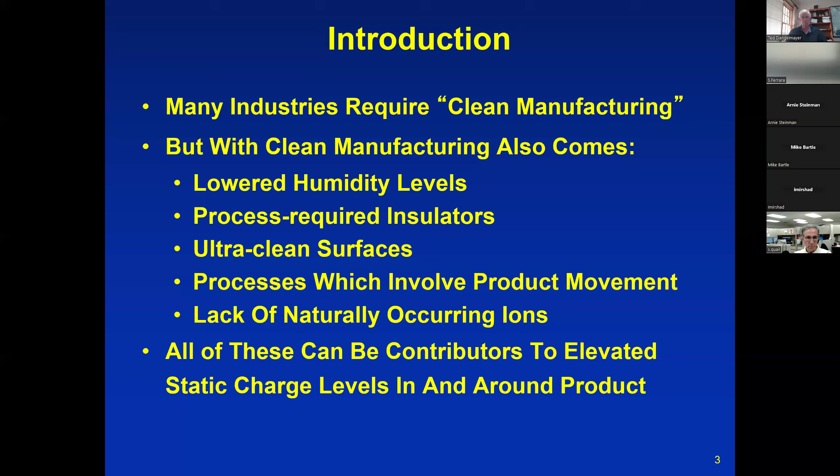So what we're going to talk about today is attraction, adhesion, and distance. These are the particle attraction mechanisms. We'll talk about some of the items of particle physics in air, deposition velocity - that's how fast particles are being deposited on a surface. They're due to gravity, to diffusion, and electrostatics. We'll see how these three methods of particles being deposited on surfaces interact.

We'll talk about electrostatic attraction, obviously, and we'll show you how we can calculate what are the acceptable electrostatic fields. We'll talk about electrostatic charge generation, electrostatic deposition rates, and finally methods of reducing contamination deposition in the clean room.

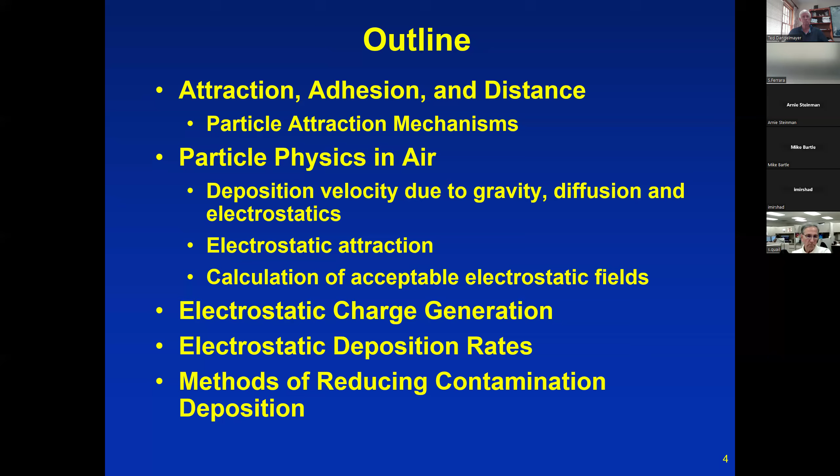Clean room. What is a clean room? A clean room is a room in which the concentration of airborne particles is controlled, and which is constructed and used in a manner to minimize the introduction, generation, and retention of particles inside the room.

Other relevant parameters like temperature, humidity, and pressure are controlled as necessary. This is the definition of a clean room that's in ISO standard 14644-1, which is called Clean Rooms and Associated Controlled Environments.

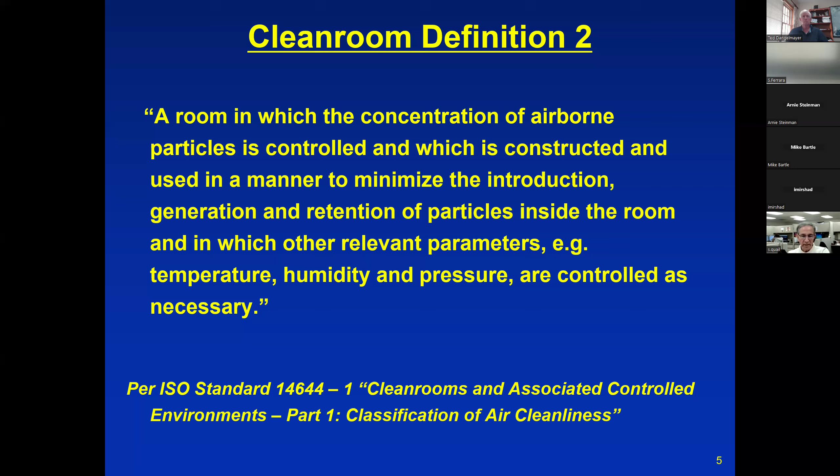Part one, the -1, is the classification of air cleanliness. And we'll see what this standard recommends in that respect.

A clean room is a space that's isolated by a wall or a similar partition where the degree of cleanliness is achieved by air pressurization and filtration.

So we have an incoming air supply. We filter it very highly with special filters, generally called either HEPA filters or ULPA filters. These are very high quality filters that take out most of the particles that will be coming in the air.

We have a wall, we have balanced pressure, and we maintain an overpressure near the floor where the air exits the clean room. So this is basically a clean room: a box, filtered air coming in, overpressure in the room to keep particles from coming in from the outside.

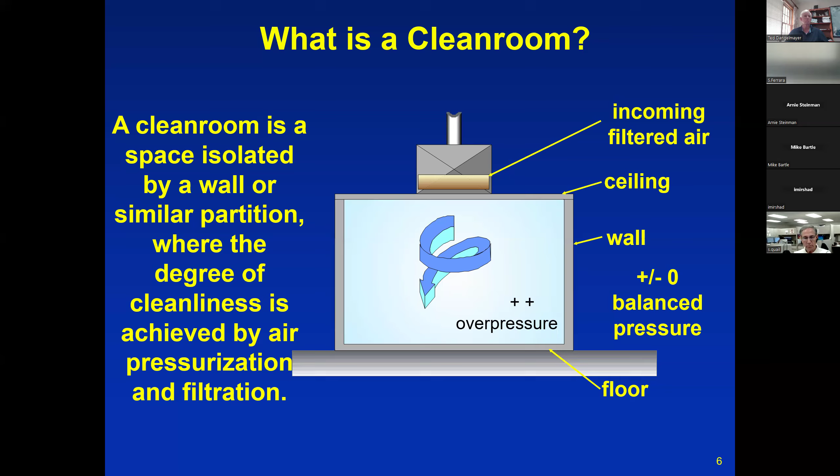Now, for many years, the industry in the US at least used what was called Federal Standard 209E.

Federal Standard 209E was an American standard, so it specified the number of particles per cubic foot that you could have in a clean room.

Now, it was replaced by ISO 14644-1, and the ISO classifications are different, but they are also always talking about the same number of particles.

209 has been obsolete for many years, but its clean room designations are still used. We still talk about class 1, class 10, class 100. These are the 209E classifications.

Now, the class 1 for standard 209E is the same as ISO class 3. So you see ISO class 3 is 1 particle per cubic foot.

ISO class 4 is 10 particles per cubic foot, and these are measured at 0.5 microns. But the number you see there on the table is 35, and that's because we're not talking about particles per cubic foot, we're talking about particles per cubic meter.

So what do we need in terms of cleanliness in our manufacturing? Well, depending upon what you're doing, the requirements for cleanliness will be different.

If you're doing chip module and bond and assembly, you need class 100,000 to class 10,000, or ISO class 8 to class 7.

For 200 millimeter semiconductor manufacturing, you're typically in either class 1000 to class 1 in the federal standard, or class 6 to class 3 in the ISO standard.

HDD assembly for hard disk drive is also ISO class 6 to class 4, or federal class 1000 to class 10. And finally, for 300 millimeter semiconductor manufacturing in integrated mini environments, we're down at ISO class 2.

Which, if it existed, would be equivalent to the federal class 0.1. So again, depending upon the manufacturing you're doing, you will have different cleanliness requirements in your clean room.

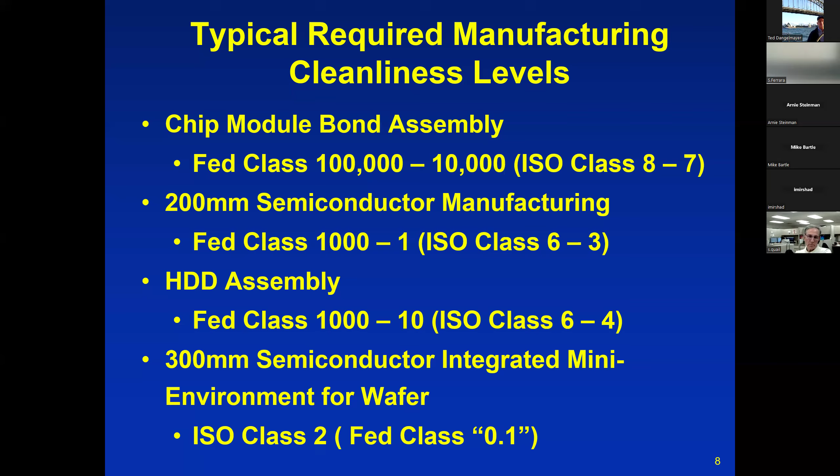Static charge problems. Our static charge problems are basically contamination and ESD. We're not going to talk about ESD in this webinar, but we are going to talk about contamination control.

So when we think about contamination, we think about the pellicles. These are the negatives that are used to put the patterns on the wafer. We talk about the wafers themselves, and we talk about equipment surfaces. These are all places where contamination can wind up because of static charge.

And the thing to remember is that if you have charged surfaces present in your clean room, the attraction through electrostatics is generally greater than the airflow, the laminar airflow.

And it will just pull particles out of the laminar airflow and deposit them on surfaces. That's the reason we want to control static charge, to reduce contamination.

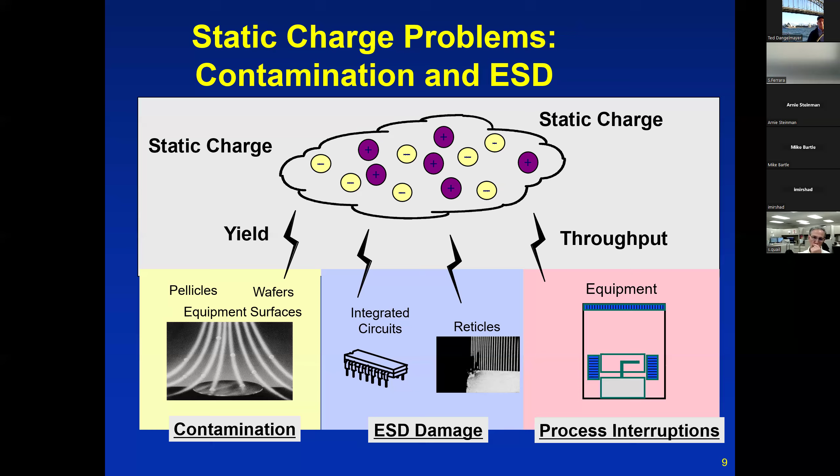So electrostatic charge attraction is a contamination issue. It's a force that can attract and bind particles to a surface. Once you have the particle on the surface, it's very difficult to remove. As you can see here, you have your airflow with particles in it, but if you have a charged surface, it will pull those particles right out of the airflow and deposit them on the surface.

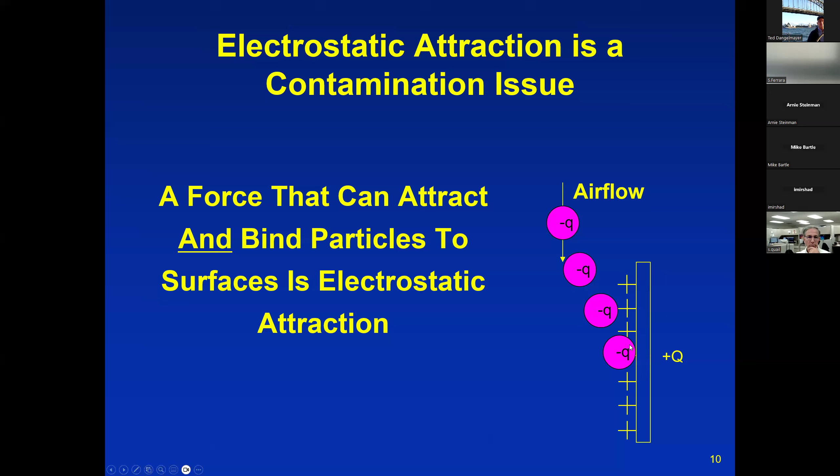So electrostatic particle contamination is a combination of effects. You have electrostatic effects in the middle, the result of which is attractive forces. You also have gravitational effects and diffusion effects, and we'll show how those compare to electrostatics in a moment. The electrostatic effects create adhesive forces which attract particles to the surface.

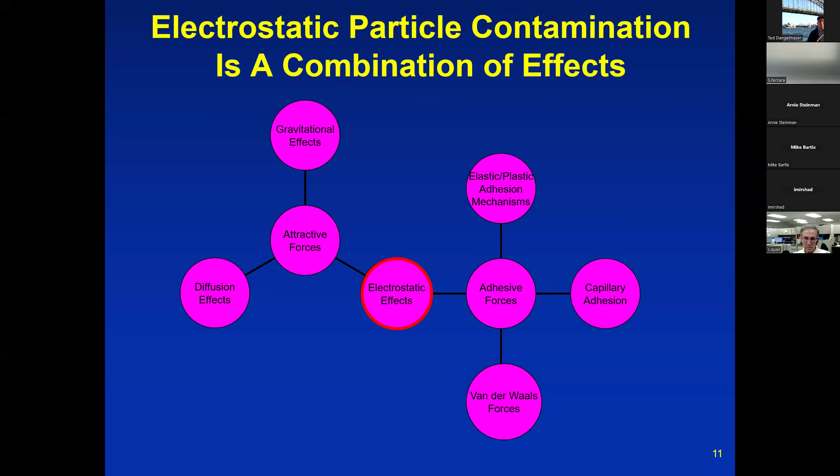Now, how do we know that charged surfaces attract particles? Many years ago at Analog Devices in Ireland, they did a study. They had an ISO class 3 mini environment, which is federal class 1. They put a 200 millimeter wafer in that mini environment and left it there for a while. They did this with two wafers. The first wafer was held at 0 volts, not charged, and after about a month you still had particles on the surface.

There are other effects besides electrostatics that will attract particles to the surface. The number here is about 4,000 particles on the wafer surface as a result of it being in that mini environment for about a month. In fact it was 6 weeks, and 6 weeks is equivalent to 1 production cycle in the wafer fab. So this is showing what would happen if the wafer was in this mini environment for that production cycle.

Now, the second wafer they held at 2,000 volts, in the same class 3 mini environment, for the same period of time, right next to the other wafer. What you see here is you have 27,000 particles, almost 7 times as many particles were attracted to that surface. So they wound up with over 23,000 more particles on the surface, and the only difference between the two wafers was the charge on the second wafer.

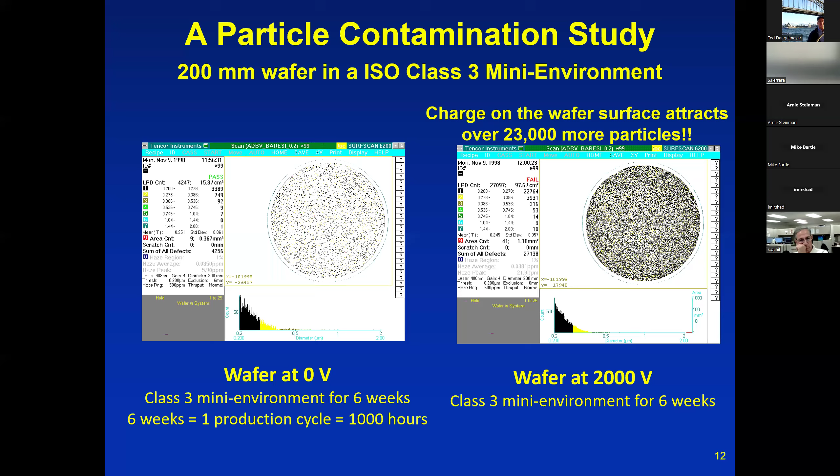So we know that if we have a charged surface and we leave it in a clean room, it's just going to attract lots and lots of particles.

So we have what we call the particle deposition velocity. This is the rate at which particles are deposited on a surface. We find that there are 3 major effects on this deposition velocity: gravitational effects, diffusion effects, and electrostatic effects. All three of these affect the particle deposition velocity. The higher the velocity, the more particles that are deposited on the surface in a given amount of time. We'll look at this in a little bit more detail.

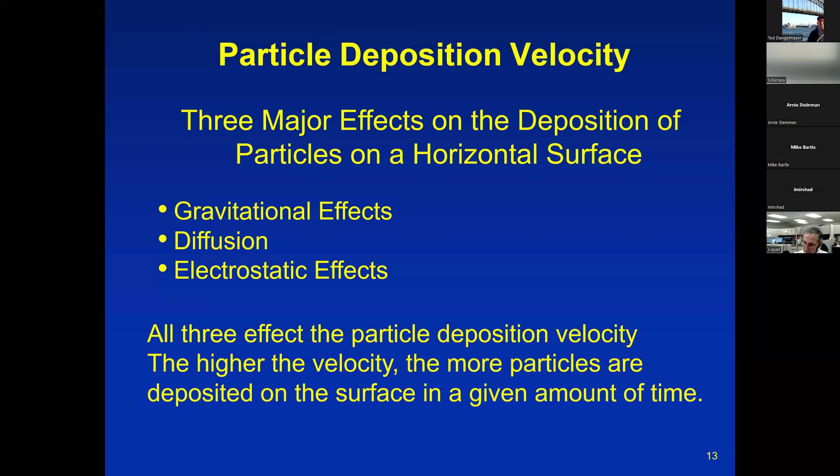This is a chart that came from a researcher at IBM, and what you see here are the various effects that cause particles to be deposited on a surface. Gravitational effects increase as the particle size gets greater, that's this red line here. We have diffusion effects, shown as the blue line, and they increase as the particles get smaller.

Now the green line here, which you can just see, is the electrostatic effects. Now this heavy purple line here is the combined gravitational, diffusion, and electrostatics. What's really interesting is that when you get down below 1 micron in particle size, the electrostatic effects really predominate, and you're looking at a line that's almost the same as that green line.

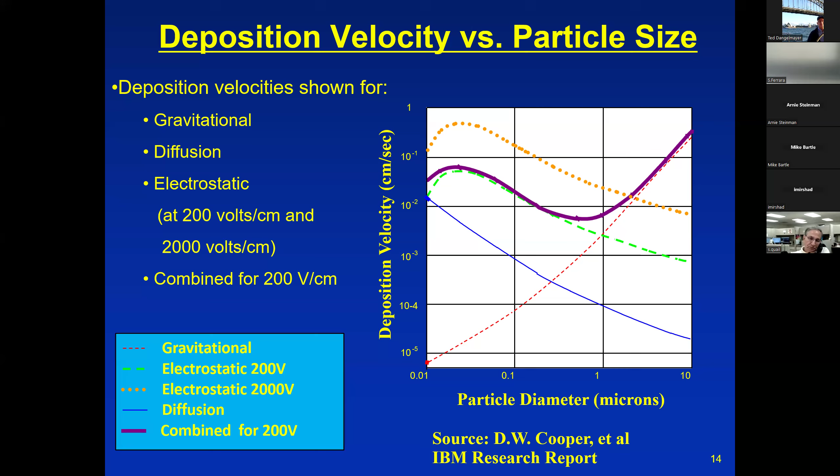And this is only at 200 volts per centimeter. If we go up to 2000 volts per centimeter, which is not an unusual number in a clean room to find on surfaces, we have this orange dotted line here. You can see that when you get down below maybe two microns in size, electrostatics predominates. So electrostatics can be the most important part of the deposition velocity, and it really does affect the particles deposited on surfaces much more than any of the other diffusion or gravitational effects.

Okay, so we want to reduce the deposition rate due to ESA. And we have an equation here. N is the number of particles that are deposited on the surface. And you see you have some things that you can control here. Now, the first thing, if you want to reduce the number of particles that are deposited on the surface, reduce C, the concentration of airborne particles. Obviously, the cleaner you make the room, the cleaner the surfaces will be. So reducing the concentration of airborne particles is the first thing you can do to reduce the particles on surfaces.

Second of all, we have Q, the charge on the particles. If we get the charge off the particles, we get the charge off of the surfaces, we will reduce the number of particles that are being deposited on the surface. Then we can reduce E, the electric field. The electric field is the result of a charge Q that's on the surface that we're trying to keep clean. So if we reduce C, the concentration of airborne particles, if we reduce Q, the charge on the particles, and we reduce E, the electric field on the surface that we want to keep clean, these will all reduce the deposition rate of particles on the surface.

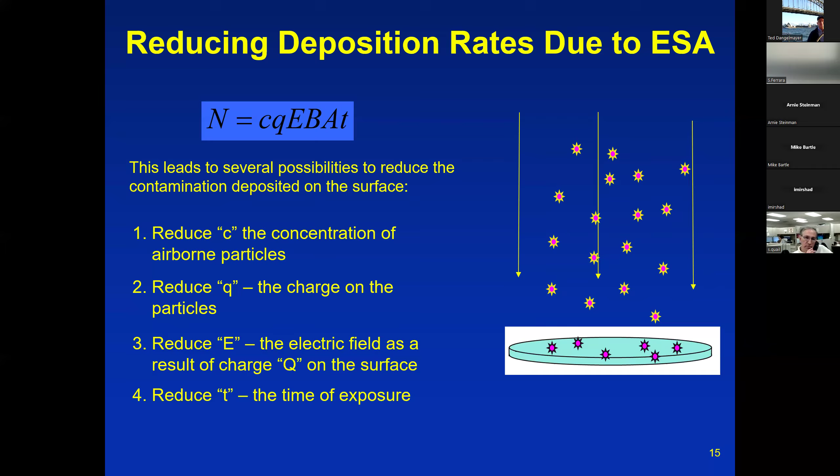And finally, reduce T, the time of exposure. That should be clear that you don't want to leave your product exposed for 6 weeks in the room, because you'll get a lot of particles on the surfaces, as we saw in the analog devices test.

So how do we reduce E and Q? Those are our electrostatic issues. Q is the charge on the particles, best reduced with using ionization. E is the charge on the surfaces that we're trying to keep clean. And we can accomplish that by using standard ESD control measures. Prevent the surfaces from becoming charged. Ground them if they're conductive so that you can remove the charge from the surface. And finally, if they're not conductive, if you have an insulator, you can neutralize that surface again using ionization. So you have your standard ESD control measures that are used to control the static charge on surfaces, which will allow you to keep things clean.

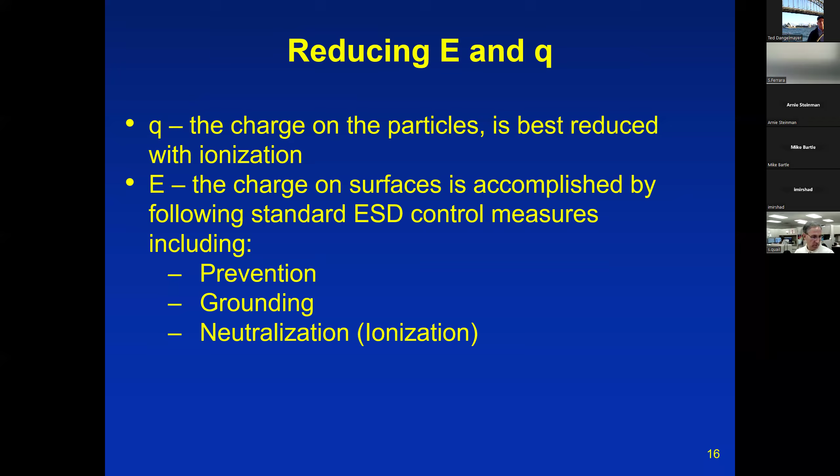Triboelectrification. Triboelectrification is not your friend. Static charge is always generated when two materials are in contact and then are separated. You wind up with an equal and opposite charge formed on the opposing surfaces. Now, if one of those surfaces happens to be conductive, you can ground that surface, and the triboelectrification will only occur on the material that contacts the conductive surface. So basically, whenever you have things moving, when you have contact and separation, you can get static charge being generated.

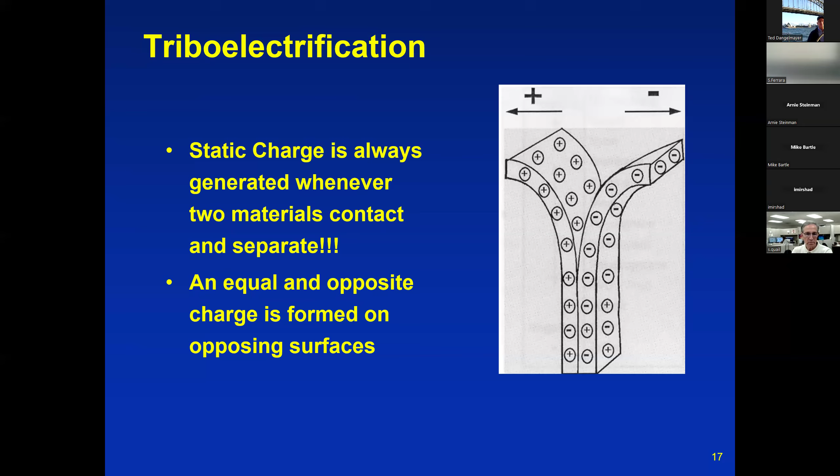So basically, a very interesting thing here is you never know what the charge might be. If your polycarbonate were to contact quartz, for instance, the polycarbonate would charge negatively and the quartz would charge positively. On the other hand, if the polycarbonate was to contact the Teflon that was in the room, the polycarbonate would now charge positively and the Teflon would charge negatively. So you have no way of knowing ahead of time what polarity the charge will be. The only thing you know for sure is that if these materials contact and separate from each other, you are going to get charge generated on those materials.

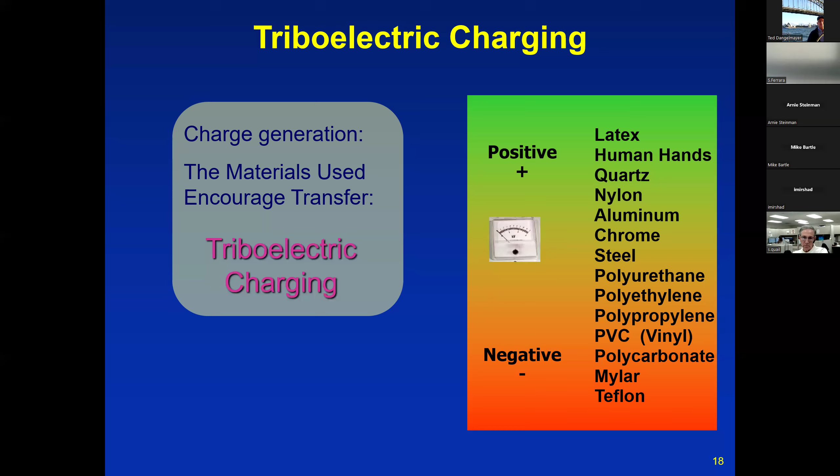Arnie, we have a question that came in. Sure. Let's take the question.

For EMS production, normally clean areas are not needed. Is there any recommended class? It sounds like what you're saying is that there isn't really a contamination issue in this EMS production. And if that's the case, then you want to control static charge, if for nothing else, for ESD control. So even though you might not have a contamination issue, you might have an ESD issue that needs mitigation through static control methods. I hope that answers the question.

All right. I'm assuming it does, but we can go on here. Thanks. You're welcome.

Some of the sources of triboelectric charging, you'll find all of these are part of your clean room environment. When it comes to product handling, manual handling uses tweezers. There might be robots that move things around. You have tools like pliers that contact the product, and the product may be transported over rollers. This is all contact and separation, and it is a source of tribocharging. Wet and cryogenic processes, cleaning and etch, these are all, again, sources of tribocharging. Wipe down. That's the thing about clean rooms. Clean rooms have to be kept clean, and we are normally wiping them down constantly.

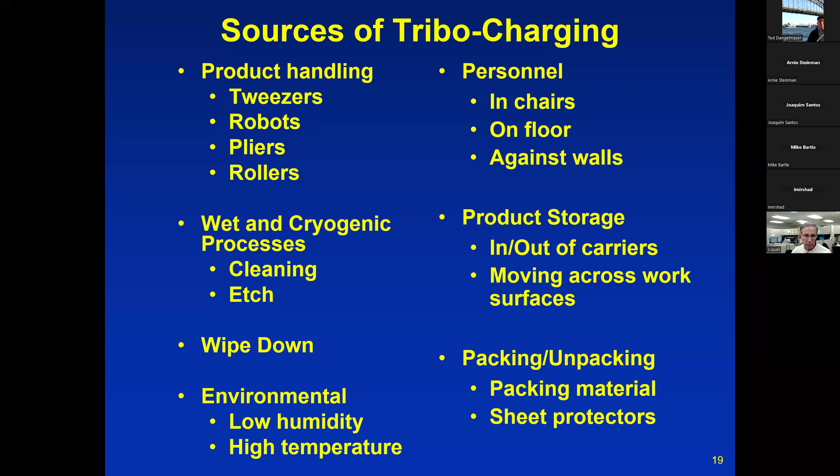Product storage, again, you move your product in and out of carriers, you move it across work surfaces. Anytime you have motion, you have contact and separation, and you have tribocharging. And then finally, packaging materials. The packaging material itself may come in contact with your product, and it can be charged from that contact and separation. And then we use a lot of sheet protectors to keep track of what we're doing in the clean room. And basically those sheet protectors are a source of static charge. So lots of sources of tribocharging in the clean area.

Cleanroom ESD issues. What are the issues here? We have many ESD sensitive products and they must be manufactured in clean environments. Examples are semiconductors, disk drives, medical devices, lasers, precision optics. These are all things that need to be manufactured in a clean environment because particle contamination causes defects in these products.

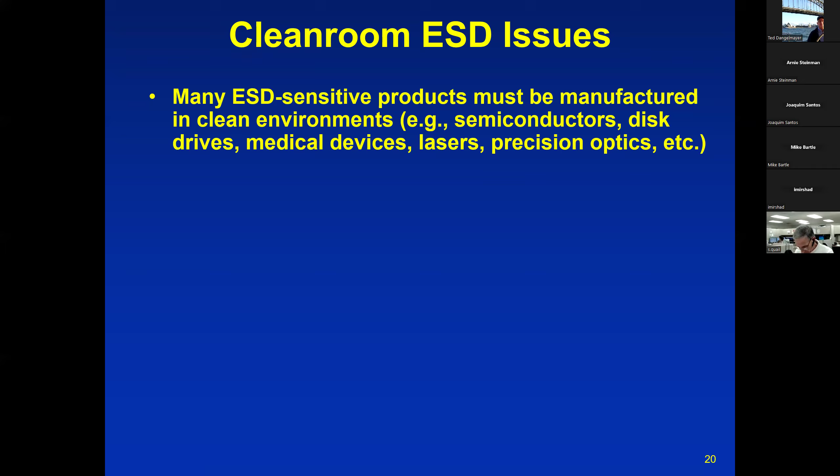Now, as we talked about before, clean manufacturing conditions include lower humidity, process required insulators, ultra clean surfaces, processes requiring rapid product movement, and minimal naturally occurring air ions. These are all things that make the static charge problem in the clean room worse. All of these conditions cause elevated static charge levels on and around ESD sensitive product. It's not only the product itself that becomes charged, it's the surfaces near the product, which can cause, with their electric fields, the attraction of particles to our sensitive product.

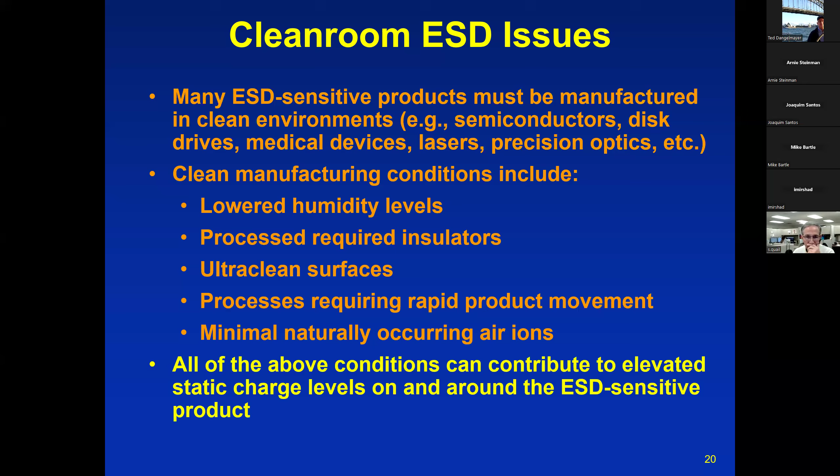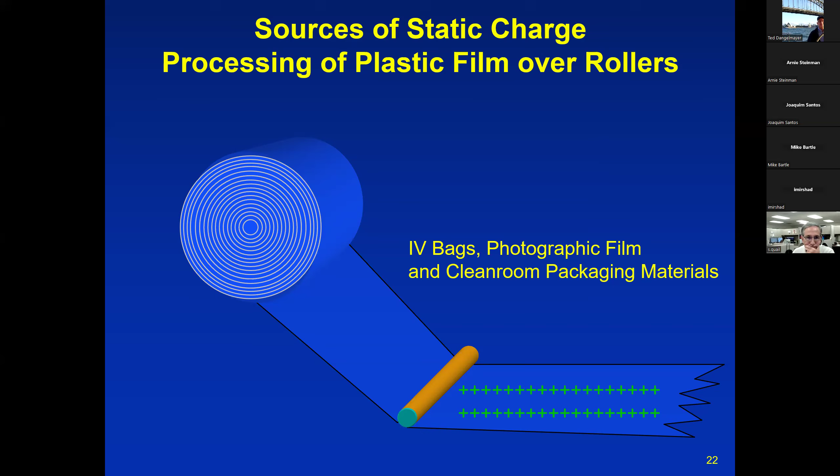Handling plastic parts. You're wearing gloves. The plastic parts are a different material than your glove material. Even though the gloves may be ESD rated gloves, they still will cause tribocharging when you handle other insulators like plastic parts. You have plastic film that you may have to process, and it usually is transported over rollers, and the contact and separation between the film and the rollers causes static charging.

A vibrating hopper. These are using the vibration to cause the product to move, and all of that motion causes static charge to be generated on the product, on the materials that are in that vibrating hopper. So there they are. This is also a cause of static charge, and it needs to be mitigated to prevent the attraction of contamination.

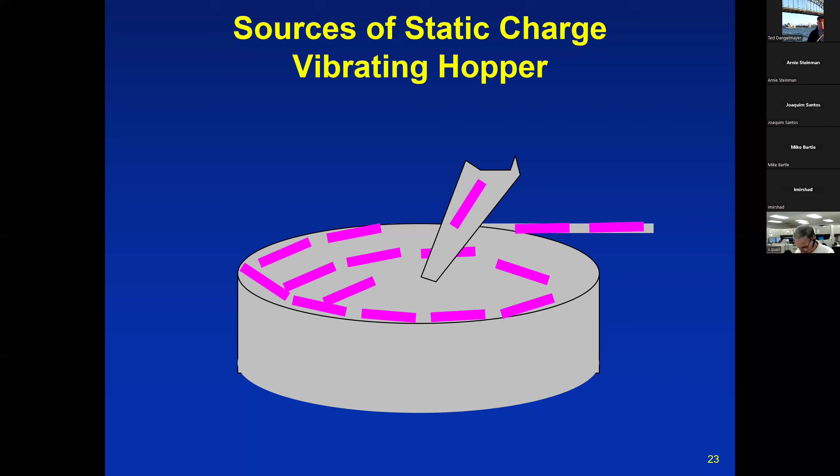Routine cleaning. In the clean room, you are cleaning all the time. And the contact between the wipes and the surfaces is what causes static charging. As I mentioned before, moisten the wipes, IPA or water, and you will significantly reduce the triboelectric charging that is occurring when you do this routine cleaning.

Now, what we have in the clean room is ultra clean surfaces. You want to keep everything clean because if the surfaces themselves are not clean, they can transfer particles to your product, and that's not what you want happening. Clean room protocol typically calls for frequent cleaning of surfaces. And the result of this frequent cleaning is that it minimizes the conductive film of contamination that helps dissipate static charge. In other words, contamination has an upside in that it generally tends to be dissipative, and it takes the charge off the surfaces. When you do frequent cleaning, you get rid of that conductive film, and the contamination now deposits on your product surfaces.

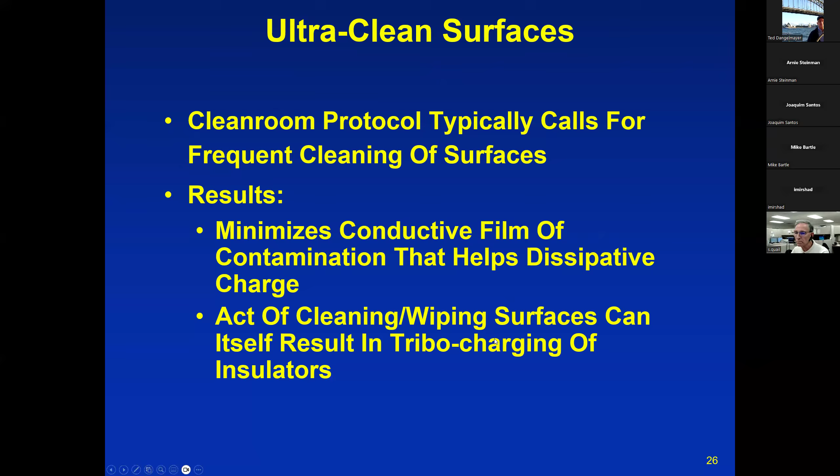So as I was saying, the act of cleaning and wiping of surfaces can itself result in tribo-charging of the insulators if the surfaces are insulators. So you want to be aware that that's going to happen. Now, process required insulators. That's why we have a problem with insulators. Different manufacturing uses different insulators, but we see glass plates. We see our lithographic reticles. These are the negatives that make the patterns on the wafer.

The IC and component packages are epoxy, so that's an insulator that can charge. Our printed circuit boards are insulators, and they can charge. If we have to store chemicals and use them during a process, the chemical containers themselves are usually insulators to keep them from reacting chemically with their contents. Wet process surfaces: anytime you have a surface that has water on it and you physically remove the water from the surface, it causes charging. Oxide-coated wafers are insulators, they can charge.

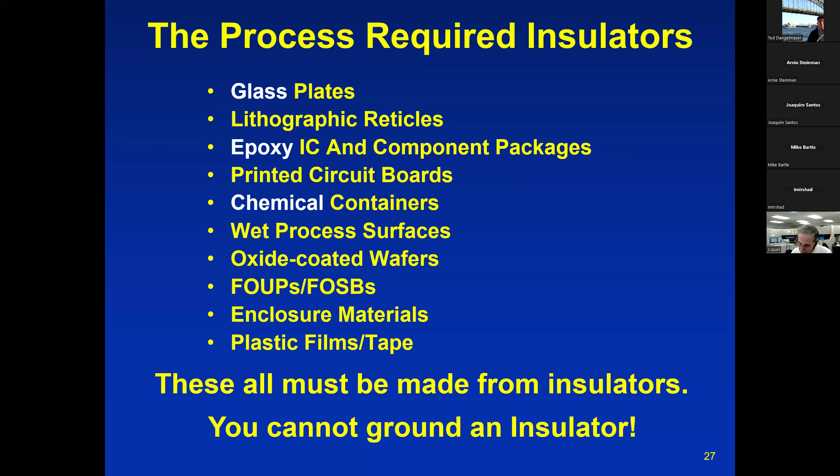So one of the things we can do in the clean room is use low particulating static control materials. We want to get rid of the insulators. We want to use materials that are static dissipative or conductive so that we can connect them to ground and make sure they're not charged.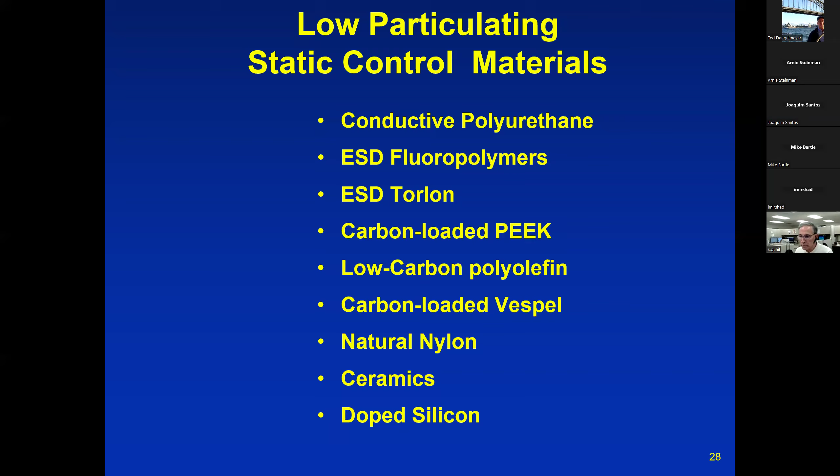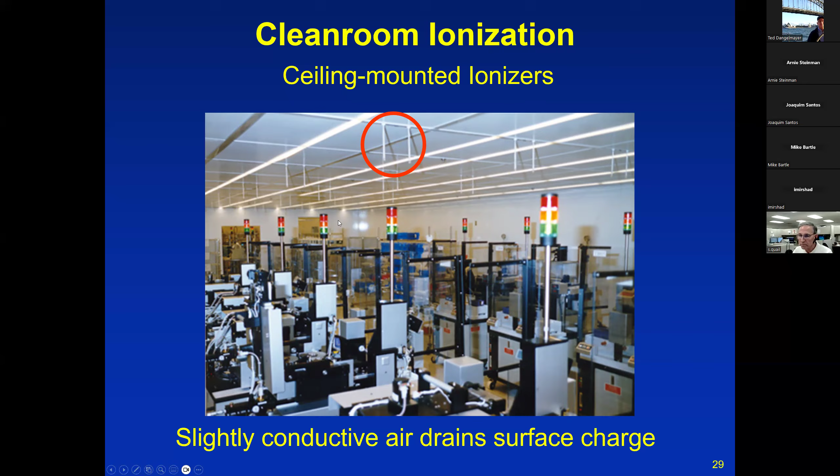So this is one method. This is a room where you have your controlling static charge to make sure that the product that's handled by these machines does not become charged and attract contamination. Slightly conductive air caused by the ionizer drains the surface charge and reduces the particle attraction.

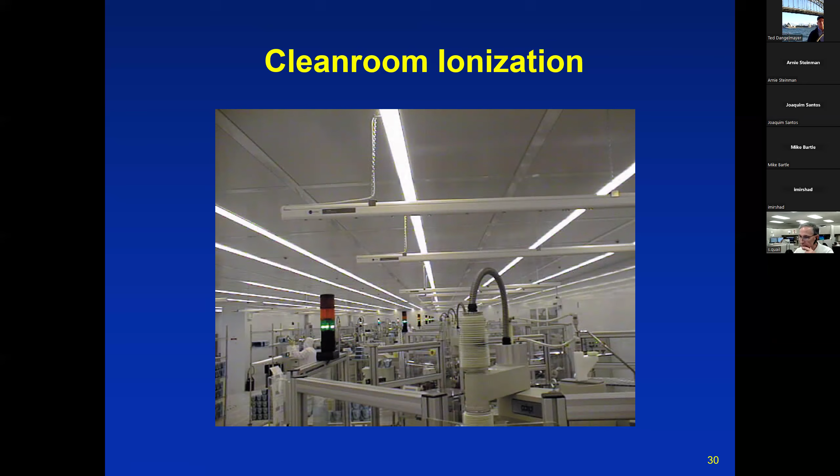So how do we engineer cleanroom ESD control? This is also for cleanroom ESD control. First of all, we ground everything that is conductive, including people. That's why people wear wrist straps—we want to ground them. That's why they wear foot straps—we want to ground them. So we want to ground everything that's conductive in the room, including the personnel.

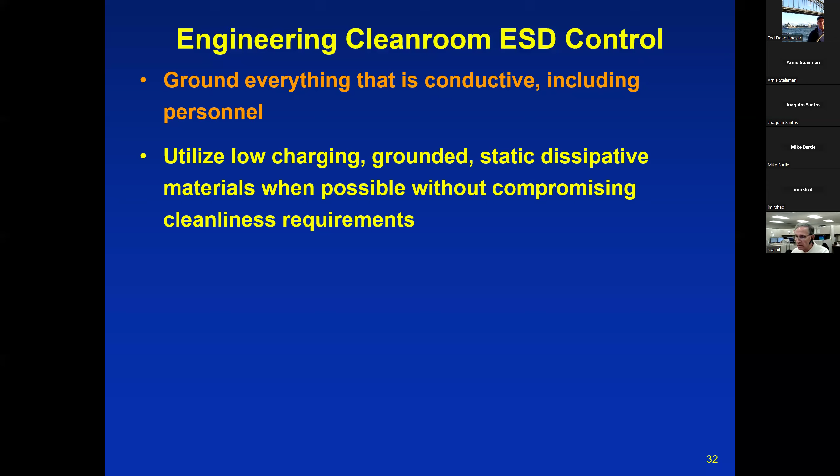We want to use low charging, grounded, static dissipative materials whenever possible. However, we have to be sure that the materials we're using are not going to compromise the clean room requirements. So basically you want these low charging, static dissipative materials, but you don't want them to be emitting particles. We need to make sure there's no compromise in the cleanliness requirements.

We want to avoid metal-to-metal contact of charged ESD-sensitive devices. This is ESD control. An ESD event happens from metal-to-metal contact. So if we want to avoid ESD damage to devices, we want to avoid metal-to-metal contact.

And finally, we want to properly utilize air ionization. We want to make sure that we put the ionizers where they are neutralizing the charge on surfaces that may attract particles. We want to make sure that we are removing the static charge in places where an ESD event might happen.

One of the things we always say about using air ionization: try it out. Make sure that using ionizers actually does something for you. We want to make sure that the ionizers actually do something, and if they don't do something, you don't need to use them. So always ask the ionizer suppliers to provide you with test ionizers that you can use to determine whether the ionizers are actually going to solve your static problem.

One more thing that we always have everywhere we're trying to do static control in the clean room: we want to do personnel training and program auditing. Basically, increased awareness helps eliminate problems with personnel training. And if you're not auditing your program, you're lying to yourself that you have a static control program. Auditing is a really important part of having a static control program, and the work we do at training people involves TR53, that's the auditing document from the ESD Association. Basically, if you're not auditing your ESD control program, you don't have an ESD control program. There's no option here.

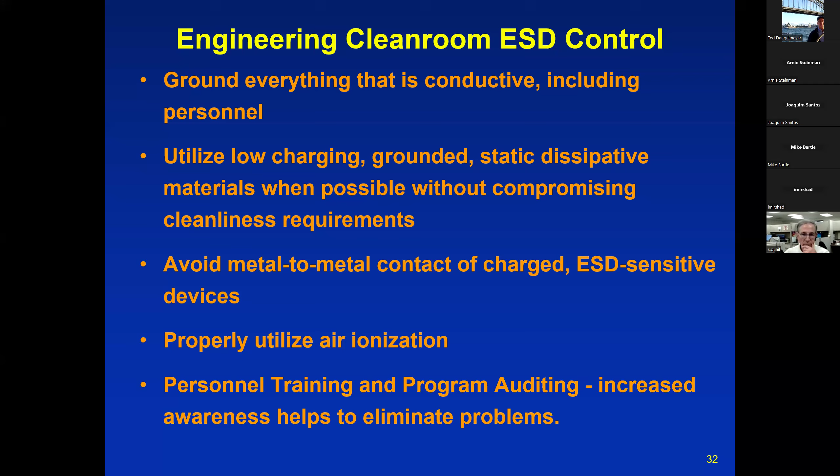And finally, to summarize what we talked about today: particulate contamination is hard to remove, and it gets harder to remove the longer it remains on surfaces. So you want to get your particle contamination off the surface as quickly as you can, and using ionization in your blow-off operation is an improvement in contamination control. It will basically get the charge off the surface, get the charge off the particles, and make sure particles are not re-attracted to the surfaces.

The forces of electrostatic attraction often exceed the attraction due to other forces. You saw from that one slide that if you have even 200 volts per centimeter on the surface, which is a very low static charge level, for particles less than 1 micron in size, electrostatic attraction is the major force that attracts particles to the surface.

And remember that controlling ESA, electrostatic attraction, requires a combination of contamination control. You need to reduce the amount of particles in the room, and you need to reduce the number of particles being attracted by static charge. Your control of ESA is a combination of both contamination control and static charge control.

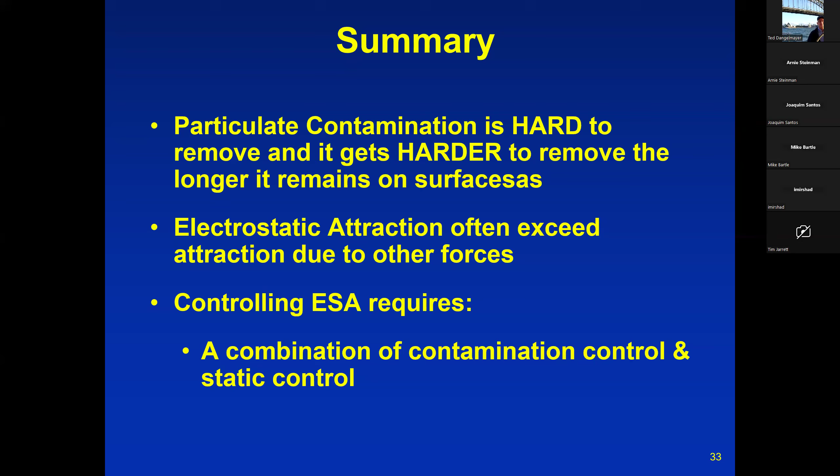Unfortunately, we've run out of time, so I can't really get into it in depth. But if there's enough interest, or if you want to contact me later, we can talk about it, or we could set up another webinar to do that.

Sorry to interrupt you, but this point is very important because I think there are two very different situations. One is component production, and another is EMS. For instance, I work in the appliance business. We are now doing a migration from mechanics to electronics, and people are not so skilled, as you know.

What I realize in my visits to my EMS suppliers is there's a mix and also a migration from people working seated and standing. It's really tough for people to pick up a box, place it in the workplace, finish the job, or go from position A to position B. But from time to time, maybe production increases, they sit, and finally people forget to connect.

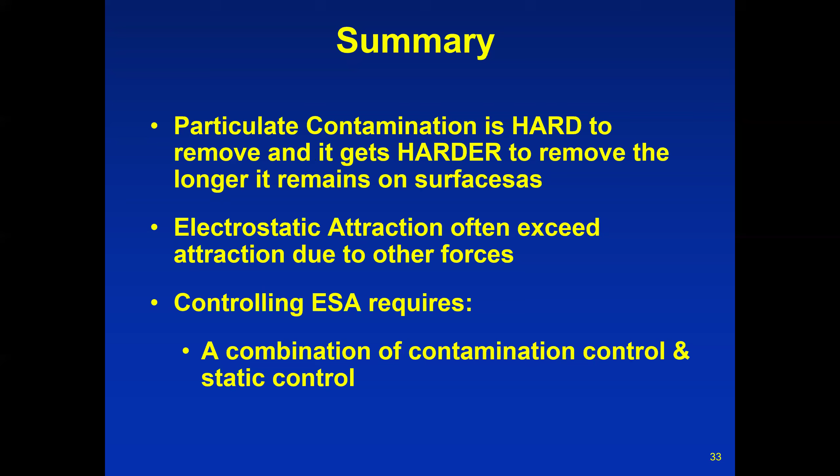What we're always concerned about is premature failures. The failures that occur in the manufacturing area, you catch those, you replace whatever parts need replacing, and you have a working device. When it fails in the customer space, you have an angry customer, and that's not what you want. So you want to make sure you're not causing ESD damage that doesn't cause an immediate failure, but causes a failure somewhere down the line.